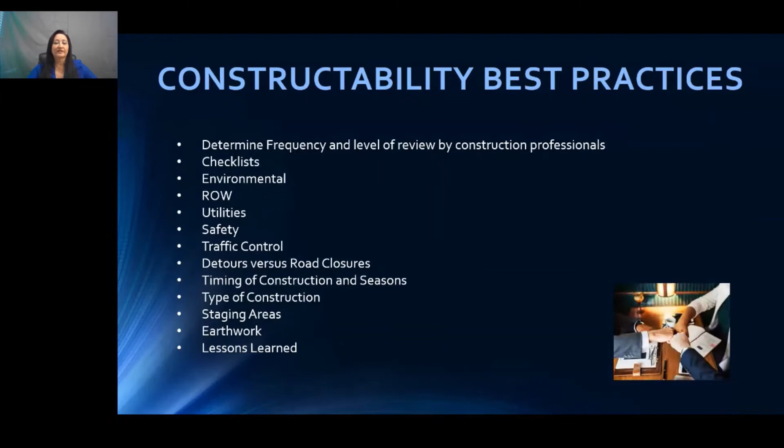And lastly, you want to document as you go for ease of incorporation, and record any lessons learned for a repository later so you don't make the same mistake twice.

Then somebody looks at it and says, that's not going to work, shows you something, and you've got to go back and redesign from scratch. Whereas if it was caught at 30%, you wouldn't have been that far along in design - it could have been resolved early on. So a little bit of time and money pulling these folks in early will save money and time on the front end, and it will more than pay for itself.

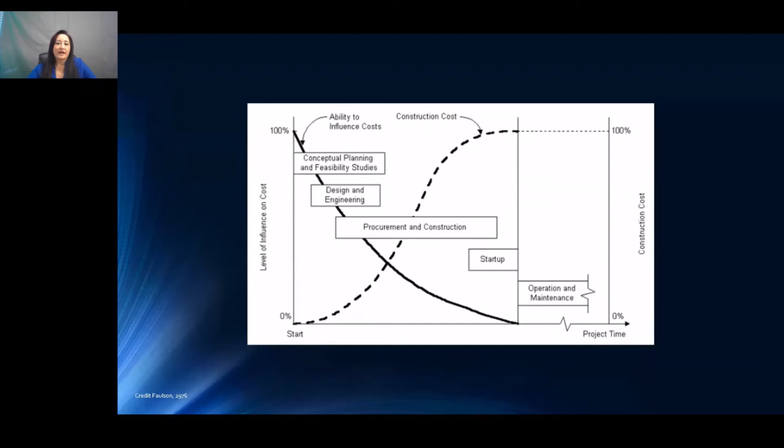As a designer and project manager, if you're looking at this from a budget perspective, just budget a few extra hours to have all of this taken care of. Again, I guarantee it will more than pay for itself.

So here's some things to ask prior to bidding. Are the plans complete? Are all the sections corresponding accordingly? Have all the impacts been considered? Will this project impact any others? Have we accounted for all the pay items and types? Are all the quantities accurate? And again, can it be built as shown?

So regarding contracts and procurement, this is a little bit of an anomaly. It's kind of a specialized field that even design and/or construction don't actually take into consideration, but it's very important to your project.

So for bid documents, they need to be clear and specific. When you're writing your specifications, especially your special provisions, it requires a little bit of a different mindset. You've been in the project, you've been designing it, you're down in the weeds of it, but the person that's bidding this and the person that's actually going to build it doesn't have access to all this information that's in the back of your brain.

So basically, what I tell people is when I write these, I try to explain it in a way that my 9-year-old daughter can understand. They need to be written in a way to convey your information and your intent to somebody who's completely unfamiliar with the project so they can understand what you're trying to do. It can't be ambiguous in any sort of way.

If you do this, it will ensure that you get better pricing on the back end because the contractors will be clear on actually what they're bidding. And I'm not saying all contractors are like this, but it will also prevent the contractor from potentially taking advantage of something that was ambiguous or vague. That way you can be certain that the low bidder isn't going to try to put in a change order late for something you may not have been very specific or clear about.

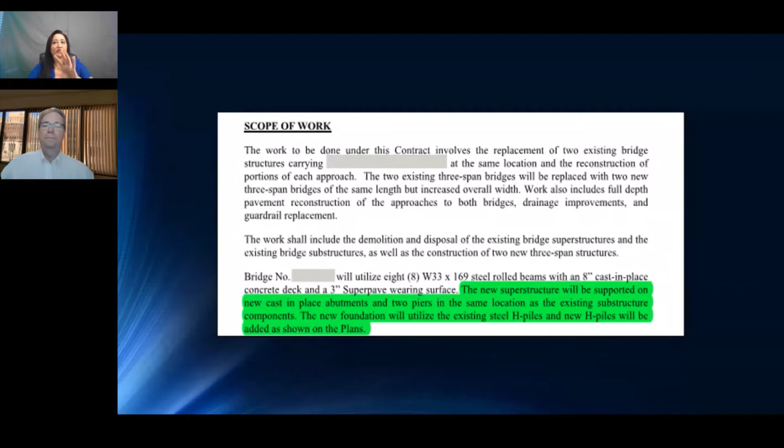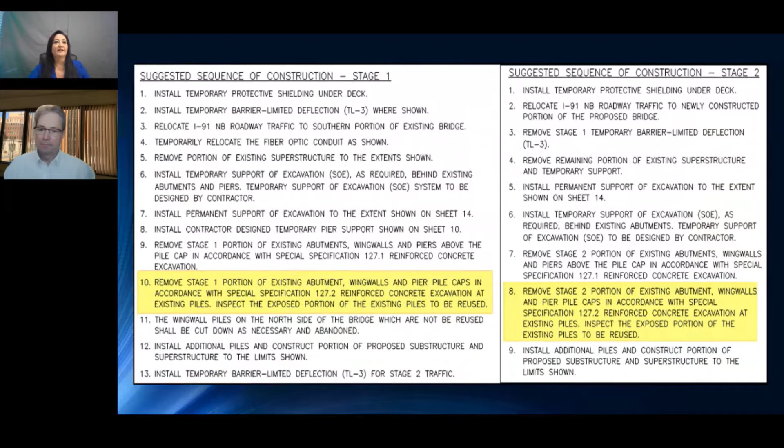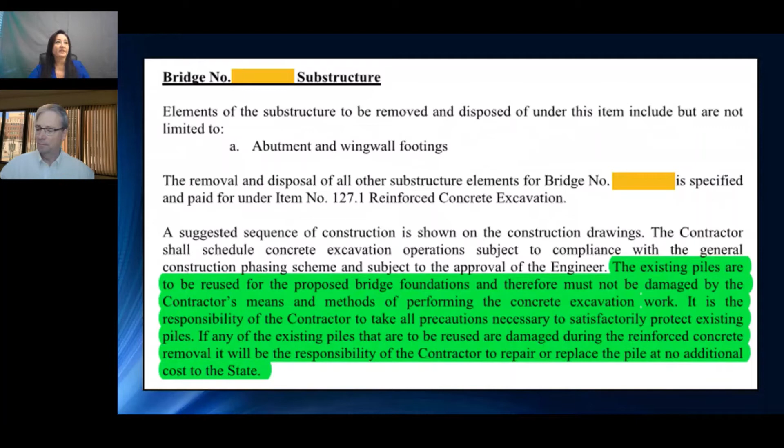So again here, we've actually got two stages, basically outlining the same stages. You are going to reuse these, you need to inspect it, you as the contractor need to make sure everything's like it's supposed to be. Again, clear: the existing piles are to be reused, you are not to damage these in any way, you are supposed to take any necessary precautions, etc. In the special provisions, again, you think they're beating a dead horse here. They've gone through everything, telling you that you as the contractor have to take and are responsible for all of these items.

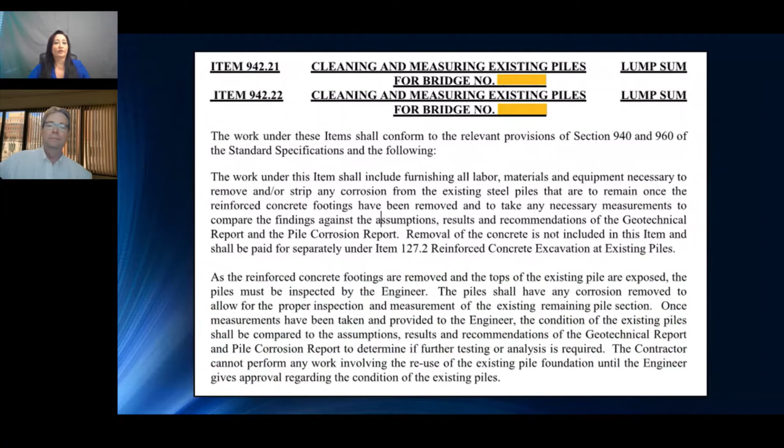But in hindsight, after this project actually went to construction, there were some problems. During the initial baseline schedule development, the contractor said, well, we assumed the designer was going to do a 3-day review period. Well, that's not realistic, but they didn't say what the requirements were. So the department tried to argue that engineering reviews are standard 30 days, but then the contractor argued, well, then you should have specified you were going to take 30 days, I thought you were only going to take 3. Specific to this example, they agreed to 7 days and moved forward. During the actual performance of the work, bearing in mind none of us have X-ray vision and can see what's under the ground.

However, anytime you're doing something, especially underground where you can't see, you want to assume the longest time frame in the worst case scenario. During the actual performance of this work, the contractor did the initial cleaning and prep that was called for, pulled everything out, and it turned out there was an apparent section loss at the top of the pile. The engineer had to go back and look at that, which took even longer than the original 7 days they'd agreed upon.

Then they had to go back and forth to figure it out, there were change orders, and everybody was confused. Ultimately, after an extended period of time and further geotechnical analysis, the engineer had to scamper to come up with an acceptable repair procedure to move the project forward. Unfortunately, all this back and forth cost the project in excess of 200 calendar days.

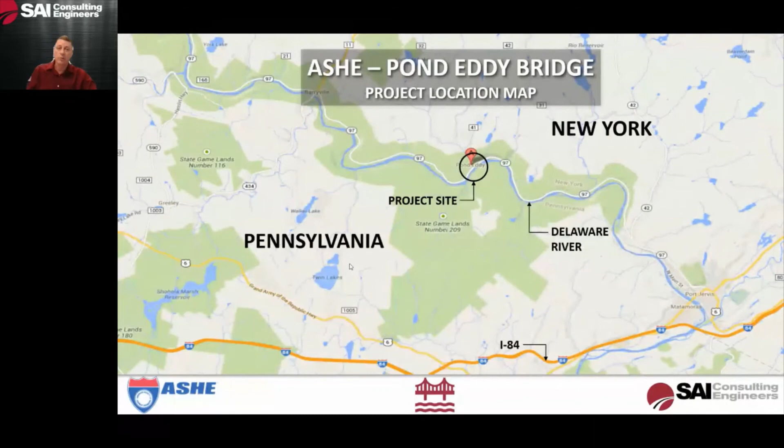This is the Pond Eddy Bridge Replacement Project. My name is Greg Soule, and I work for SAI Consulting Engineers. This project is located in Northeast PA on the Pennsylvania-New York border, and the bridge crosses the Delaware River. We are just north of Interstate 84.

The project site, New York 97, runs along the left side of the river. There are two intersecting roads, High Road and Hollow Road, on the New York side. On the Pennsylvania side of the river, we have two unimproved dirt roads and the Norfolk Southern Railroad. The Pond Eddy Bridge connects Shohola Township, Pike County, and Lumberland, New York. The site is located within the Delaware Scenic and Recreational River National Park.

What's unique about this site is that the bridge serves as the only access over the Delaware River to the community of Pond Eddy. The community is actually landlocked in Pennsylvania, surrounded by Pennsylvania game lands. The ADT on the bridge is only 30 vehicles a day. However, the boating traffic through the bridge during the summer peak season can be in the hundreds or even thousands.

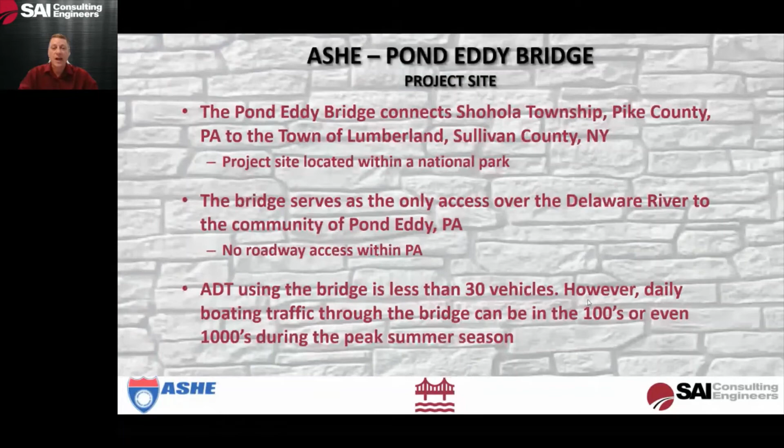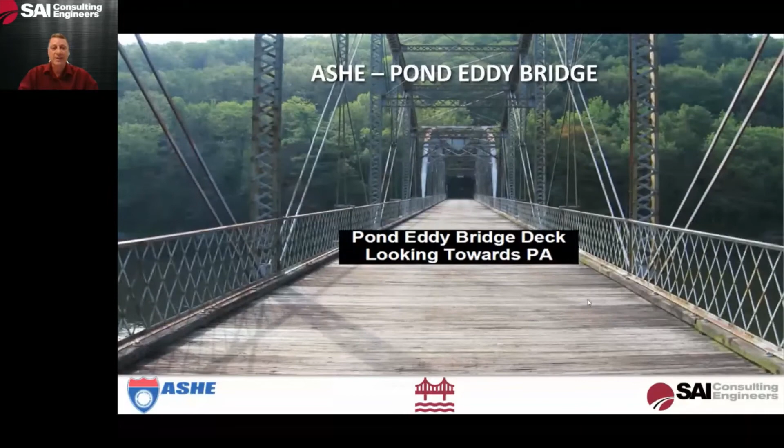This is a picture of the existing Pond Eddy Bridge looking downstream, and a picture looking at the deck. There are wood slats here. The bridge was built in 1904 and 1905. It's a single lane, two-span, pin-connected Pennsylvania through truss. The existing structure throughout design was rated as poor, with weight postings as low as 3 tons.

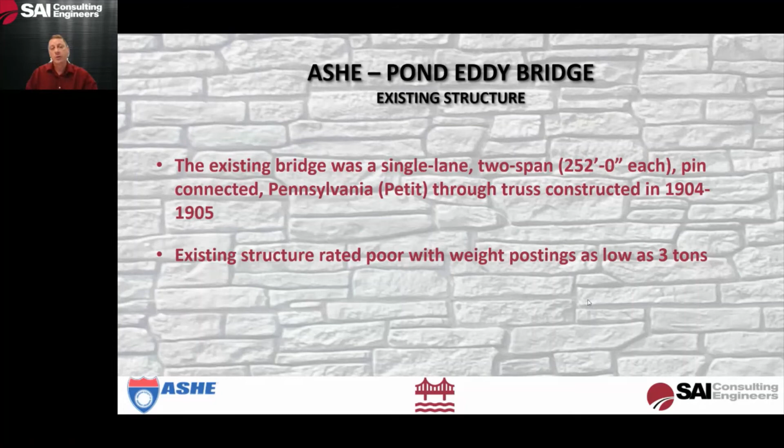What this really meant is that the residents of Pond Eddy could not be accessed by emergency vehicles, and they couldn't get delivery trucks in for things such as oil, coal, propane, those types of necessities.

So in 1993, long time ago, PennDOT began an 18-year study of alternatives with consulting parties, the public and stakeholders. They looked at a number of alternatives: no build, off-site avoidance - could we bring in a new road through the game lands to access those properties? Rehabilitation of the existing structure and full replacement. We even looked at one point at could we purchase the properties on the Pennsylvania side, but that ran into some major legal hurdles, so we had to abandon that immediately.

In 2011, a memorandum of agreement was signed to replace the bridge with a number of conditions. One, we had to do historical recordation of the bridge. We had to market the reuse of the existing bridge - we did have a couple inquiries about it at the time, but due to the deteriorated condition, we really had no takers. We formed the Pond Eddy Design Advisory Committee, or DAC, which included all of the agencies, including National Park Service, historic preservation groups, municipalities, community, anyone who had an interest in the bridge. We also agreed to archaeological monitoring during construction, which I'll cover a little bit later.

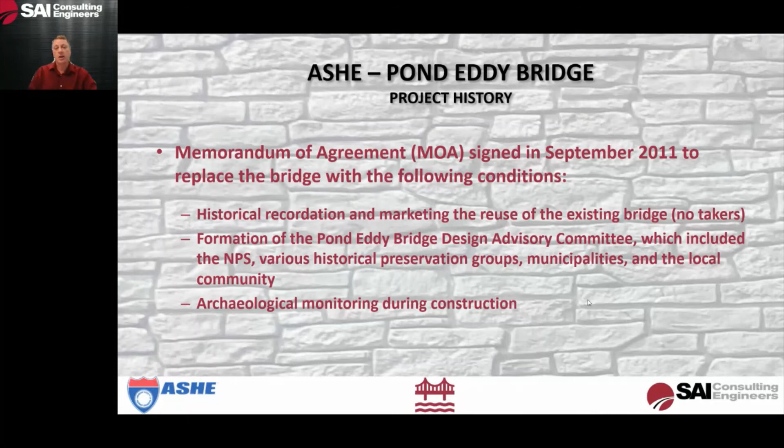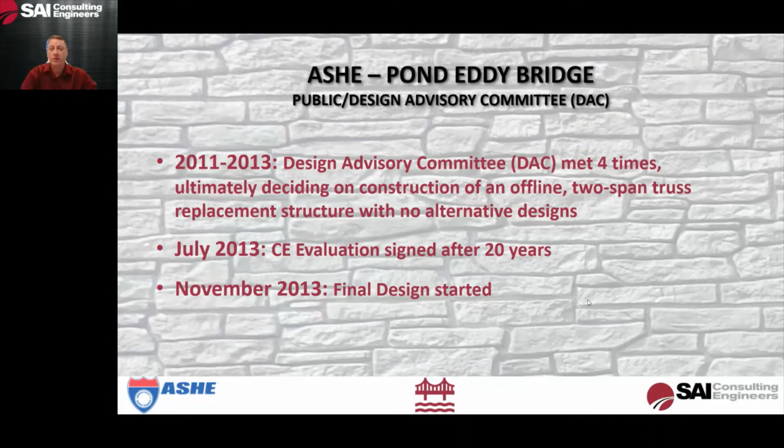From 2011 to 2013, the DAC met 4 times and ultimately decided on an offline 2-span truss replacement structure with no alternatives. They decided on everything from the configuration to the size of the bridge, to the color, to the architectural treatment, all the way down to the stone pattern, the relief, and the color of the stone staining, or the concrete staining. In July of 2013, the CE was signed after 20 years, and we started final design in November of 2013.

So what were our hurdles on this project? We had a number of environmental concerns. We were located within the national park, as I mentioned. There's a federal wild and scenic river and a PA water trail. We had shad and eel in the river, and we had to account for their migration and passage during construction. We had bald eagle nesting sites, and we also had freshwater mussels.

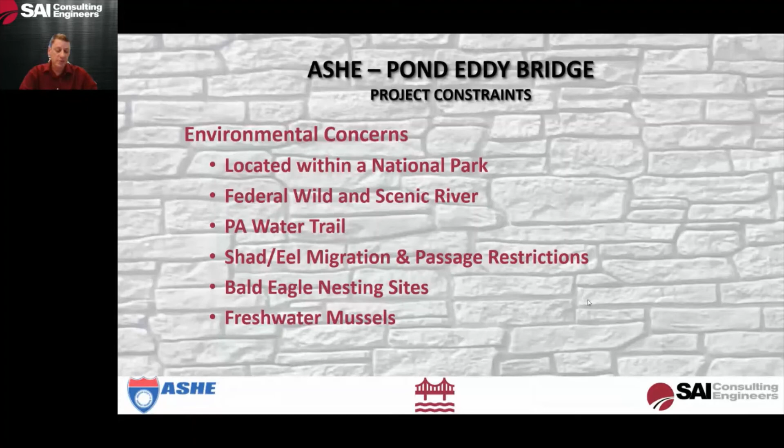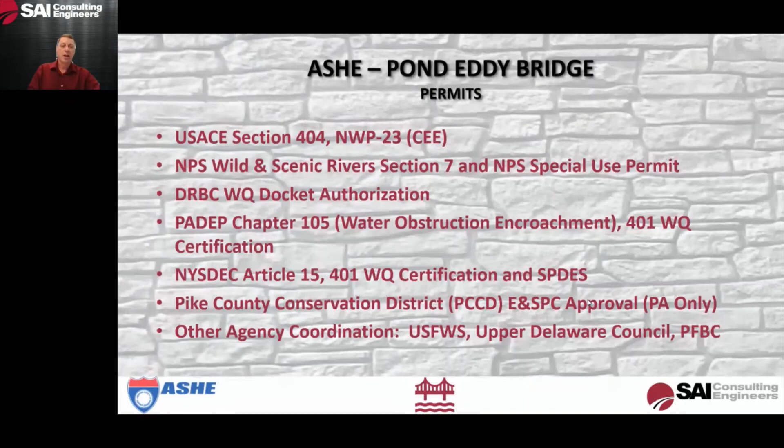With all those environmental concerns, we had our hands full obtaining the permits for this one. We were dealing with the Army Corps, National Park Service, Delaware River Basin Commission, PADEP, New York DEC, Conservation District, U.S. Fish and Wildlife, Upper Delaware Council, and Fish and Boat Commission. It was a struggle at times, but we managed to get our permits with some interesting requirements. We had to relocate over 3,000 freshwater mussels to another site on the river. We had noise restrictions - we couldn't do any demolition or pile driving from certain dates and at certain times.

We had to design the causeway to accommodate the burst speed of a shad to allow migration upstream during construction, so we couldn't have excessive velocities. We had to do pre and post construction surveys of the stream banks and bed, and maintain a hardline phone on the causeway for boaters with emergencies since there's no cell service. They also had to keep a rescue boat on site at all times, though fortunately it never got used during construction.

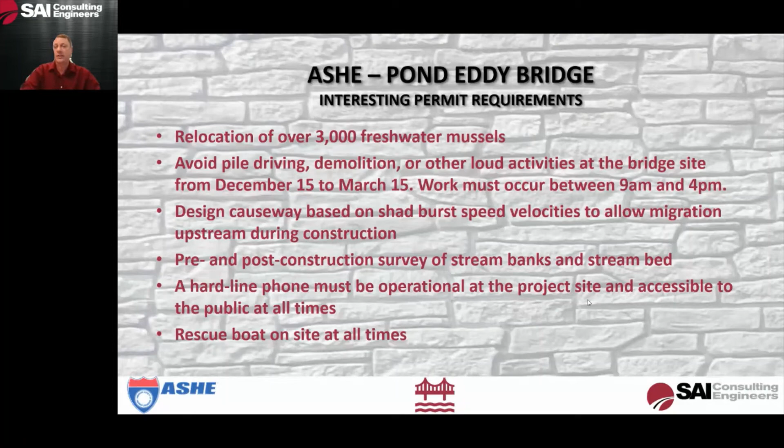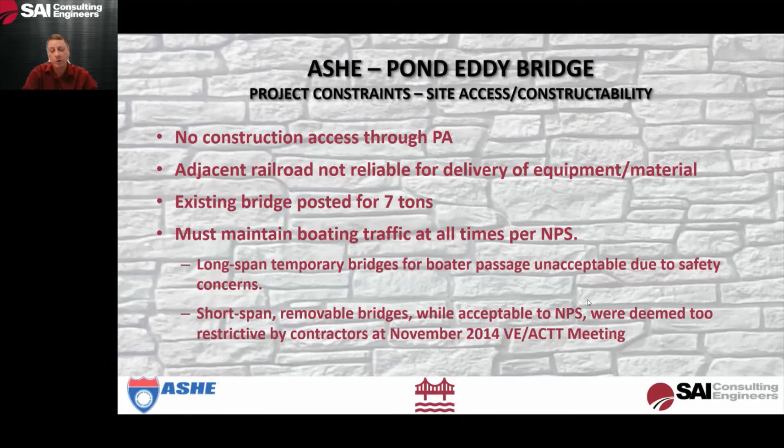The National Park Service required that we maintain boating traffic at all times. Normally we'd put in temporary bridges. We looked at long span bridges for boater passage, but the Park Service said that was a safety concern due to high water conditions and the possibility of canoes and kayakers getting stuck underneath while riding the rapids. We looked at short span removable bridges at a November 2014 VE/ACTT meeting with contractors, but they indicated those were too restrictive given the time to install and remove them, so even though it was acceptable to the Park Service, we had to rule that out.

So what we agreed to at that VE/ACTT meeting was a half-width causeway constructed in the New York Channel. Once the New York span of the truss was completed, they would relocate the rock directly from the New York Channel to the PA Channel and build a ramp from the end of the new truss down to the Pennsylvania Causeway, allowing delivery of additional materials and equipment and letting the contractor get equipment out of the river during high flows.

We had to design the causeway to allow the contractor to work 90% of all calendar days. We were trying to maintain a 150-foot minimum channel opening for the boaters, and we had to do the H&H analysis to accommodate a 5-year storm event within the 100-year floodplain.

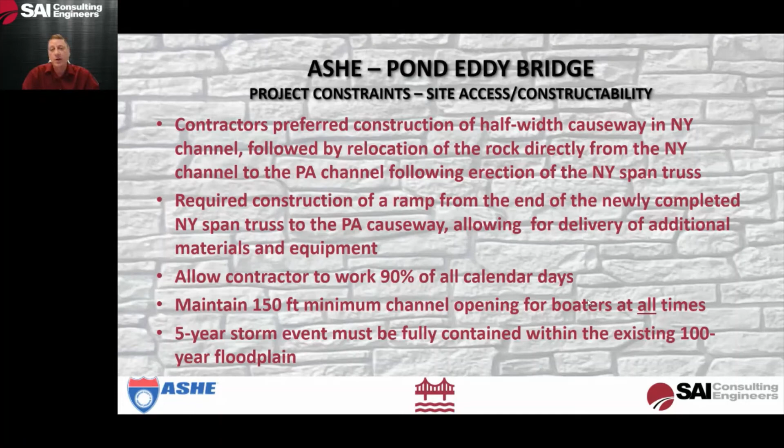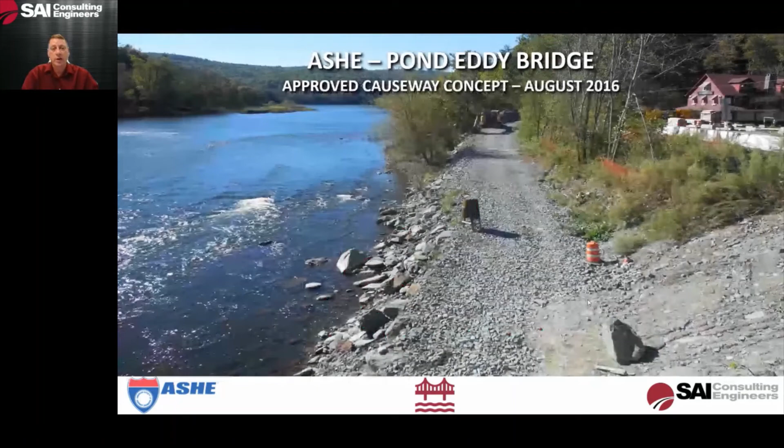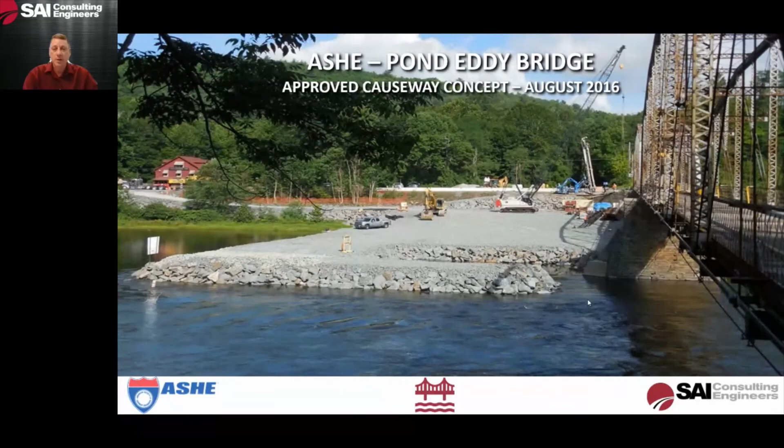So the results of all that are in the pictures to follow. We started in August 2016 with an entrance ramp to the causeway along New York 97, and then we essentially put a football field of rock, R8 and R3, into the New York Channel. You can see the contractor with all of his equipment and materials stored on that causeway. We did design the causeway to overtop and made sure that occurred. We had about a half a dozen overtopping incidents over the two years of construction.

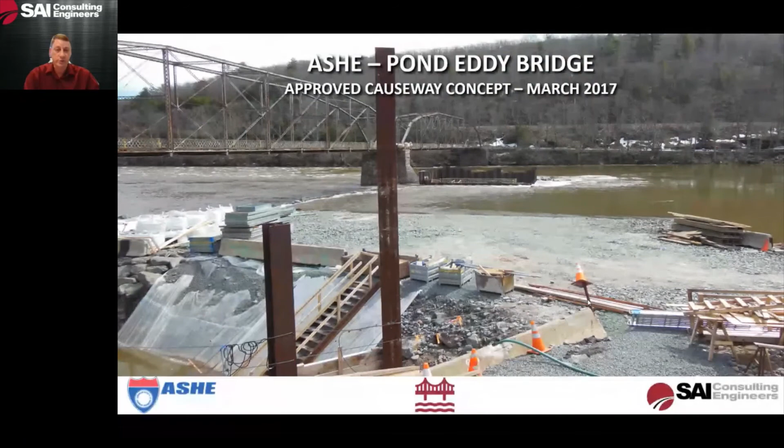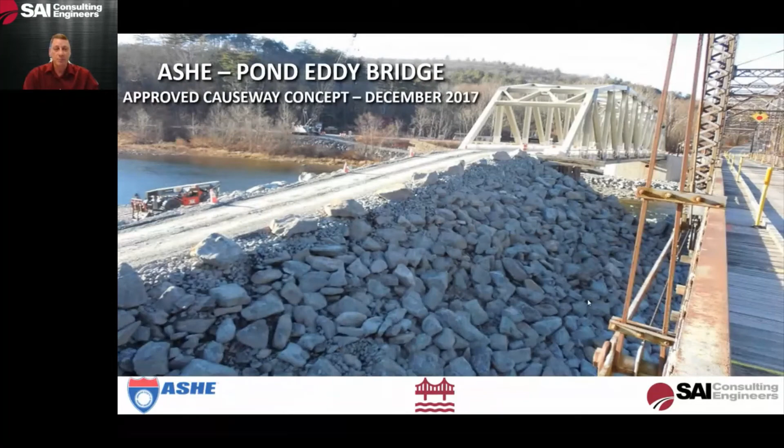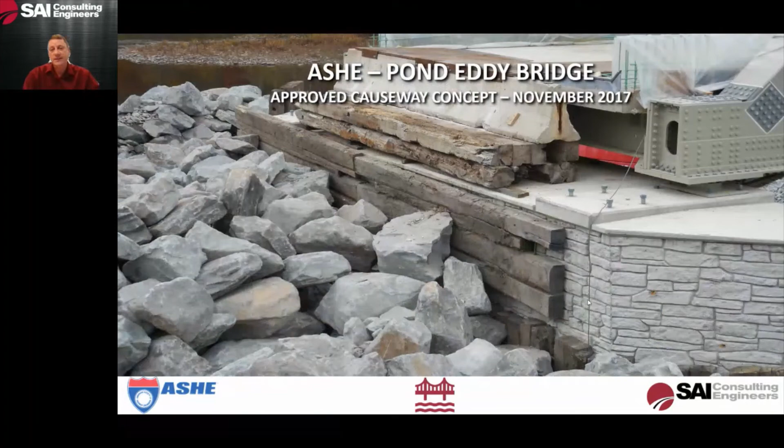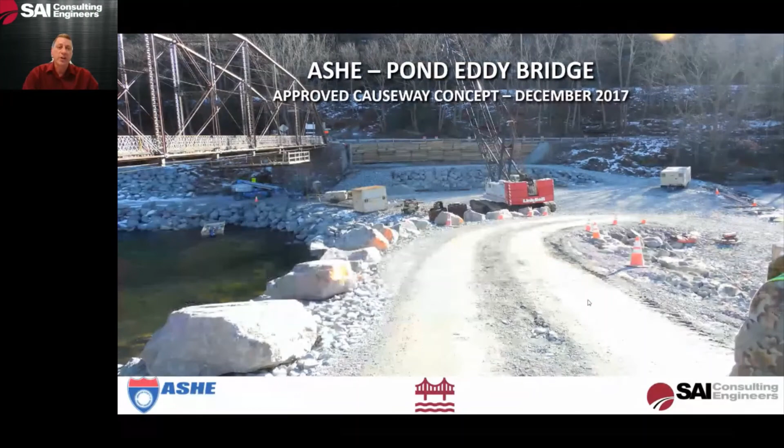This is a picture of the ramp built from the end of the New York truss down to the Pennsylvania Causeway. It was about 30 feet of R8 and R3 rock. We actually installed railroad ties against the architectural treatment of the pier to prevent any damage. This is the completed ramp on the Pennsylvania Causeway, looking down from the top. It was constructed at about a 12% grade, which was acceptable to the contractor.

We also designed an exit strategy for the contractor on the Pennsylvania side. This included a platform for staging and storage of materials and equipment, since we were very limited in area on the Pennsylvania side.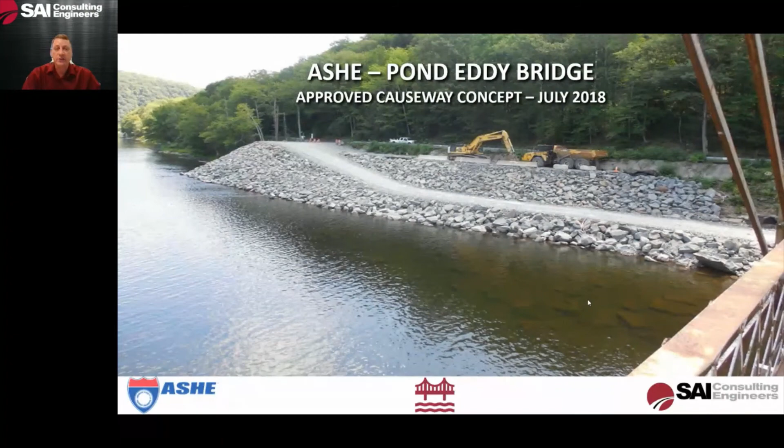Some other things we did with the design: we had continuous public outreach, including newsletters sent to the community and municipalities, and a website maintained for the project so people could get regular updates. We had several meetings with the rafting, canoeing, and boating businesses up there, who were extremely concerned about the impact on their local businesses. They weighed in on the 9-stage ATON plan we came up with. We also held a public meeting in January 2016 to update everyone, including the DAC, on the design progress, schedule and sequence of construction, and to present a 3D bridge model.

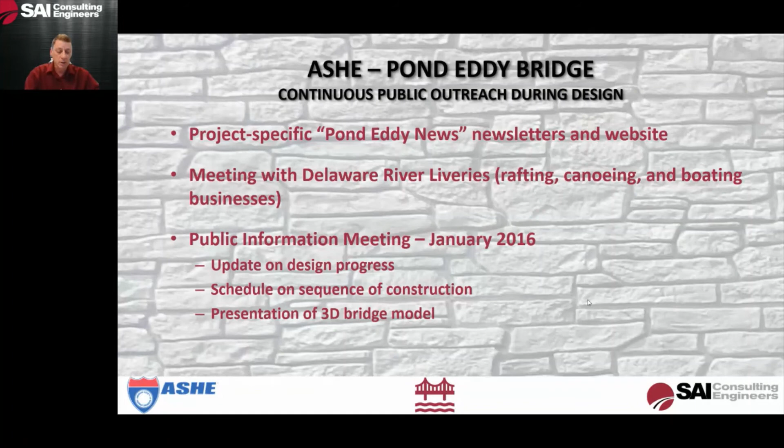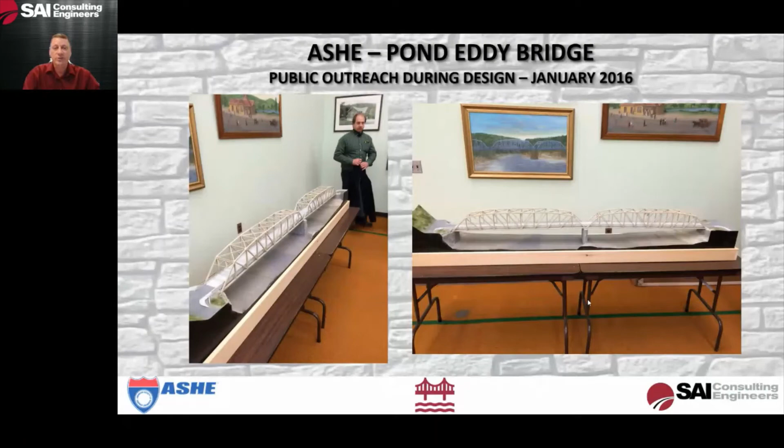We worked with PennDOT's central office. They had just acquired a new 3D printer, and we printed a model of the Pond Eddy Bridge, the new bridge. This model was taken to the public meeting and it was a huge success. If you get a chance to visit District 4's office once COVID restrictions end, you'll be able to see this model in their lobby.

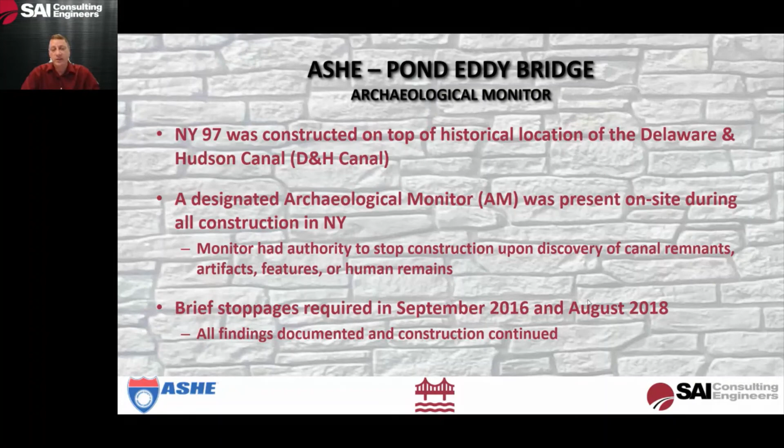I mentioned the archaeological monitor. New York 97 was constructed on top of the Delaware and Hudson Canal. We agreed to keep an archaeological monitor on site during all construction activities in New York. That monitor had the authority to stop construction upon discovery of anything related to the canal, from artifacts and features to human remains. Fortunately, we didn't find anything on the human remains side. We did have some stoppages in September 2016 and August 2018 when we uncovered a few sections of the stacked stone wall. Here are a couple of pictures of what that looked like. All of this information was documented, photographed, and construction continued right from there.

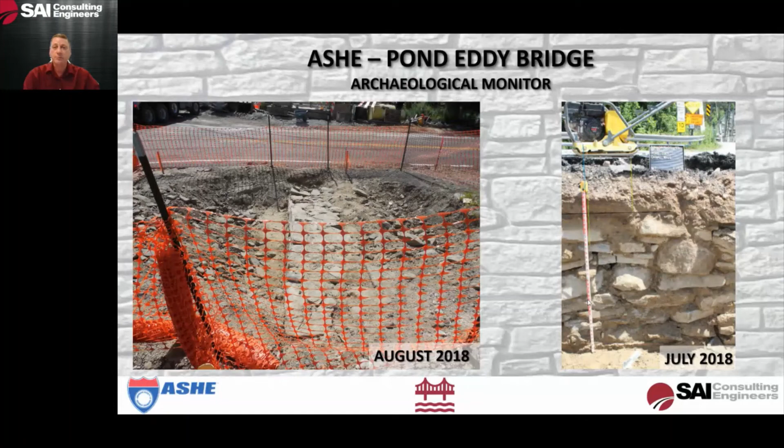I'm a highway guy, but I'll go a little into the structure design. This is a 506-foot, 2-span steel Pratt truss bridge, constructed immediately upstream. The Pennsylvania abutment used drilled caissons, and the foundation of the pier and the New York abutment used steel H-piles. The truss member size, shape, and configuration were designed to mimic the existing structure per the DAC requirements, while also meeting current design standards.

We had many redundant members in the design. In light of what happened with the truss in Tennessee, that is obviously warranted. We also did erection analysis to determine how this was going to be built on the causeway on site.

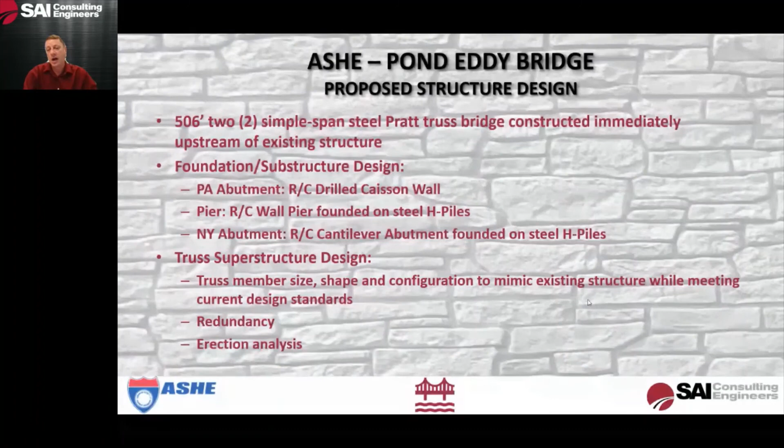The typical section is a 15-foot 8-inch travel lane. It's a 500-foot, 1-lane bridge with a 5-foot sidewalk and a 10-inch bridge barrier, about 10,000 square feet of deck area. By the numbers, we had about 1.3 million pounds of steel, 8,000 shear connectors, 2,500 feet of piles, more than 30,000 cubic yards of R8 and R3 rock placed in the Delaware River, and more than 2,000 plantings used to restore the stream banks following construction.

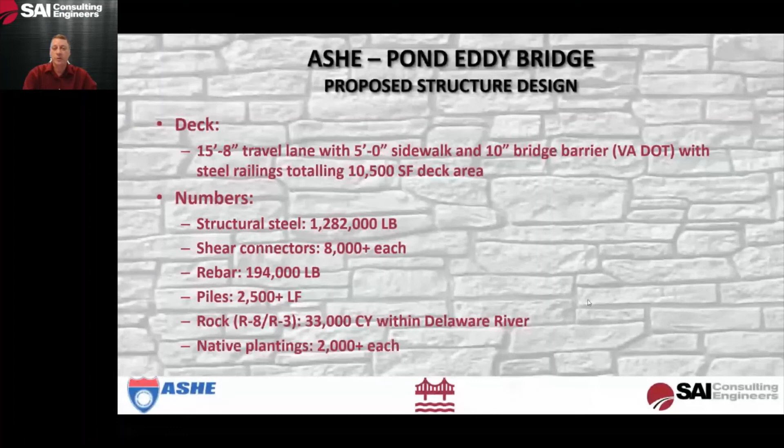Some other unique features of Pond Eddy: we used a proprietary dewatering system. We could not use traditional pumped water filter bags, so we used a truck-mounted trailer with baffles to clean the pumped water. We also had a spill containment berm that allowed us to refuel equipment on the causeway.

We did temporary and permanent relocation of a USGS stream gauge, added a National Park Service water quality monitor to the pier, and had a bioretention area in New York. We included an interpretive panel installed adjacent to the sidewalk to document the history of the bridge, and we included vibration monitoring on the existing stone masonry piers and abutments.

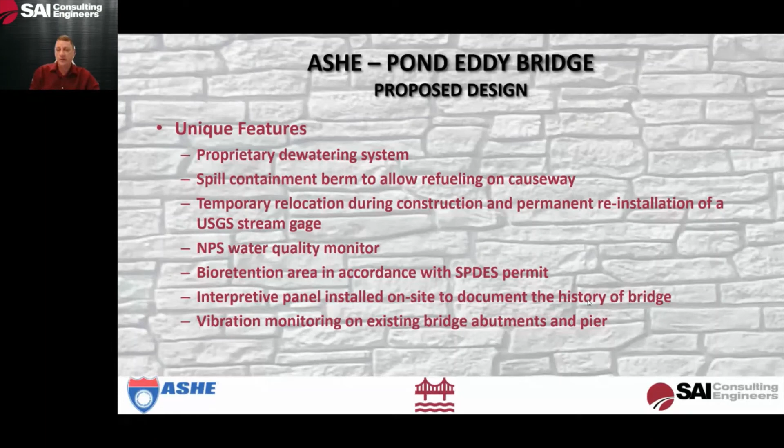There was concern that the pile driving and some of the work we needed to do during construction was going to cause stability issues with the pier and abutments. It turns out that the engineers and contractors who built the bridges in 1904 and 1905 had it together, and we didn't encounter a single problem along the way.

In April 2016, with a bid of $17.2 million, D.A. Collins from New York was awarded the contract. The fabricator was Casco Bay Steel Structures from Maine, and they got notice to proceed in June 2016.

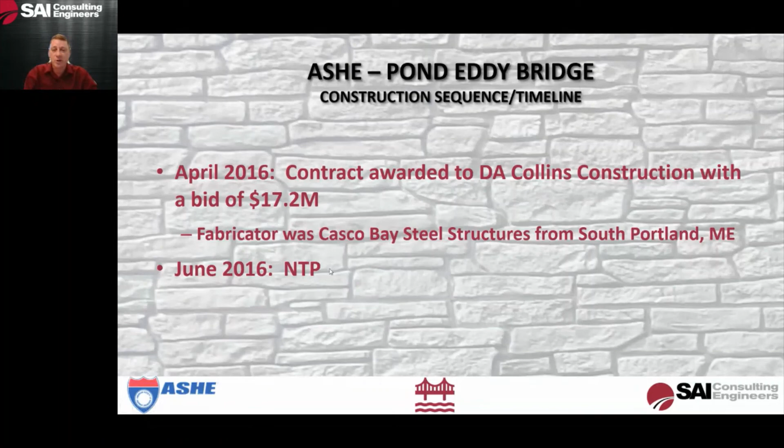With that, I'm going to take you through a bunch of pictures from construction. Since we're somewhat limited on time, I'll move through these pretty quickly. We were fortunate that SAI was on board for construction services. We attended bi-weekly construction meetings with the contractor and PennDOT throughout construction, and we learned a tremendous amount from being on site so regularly.

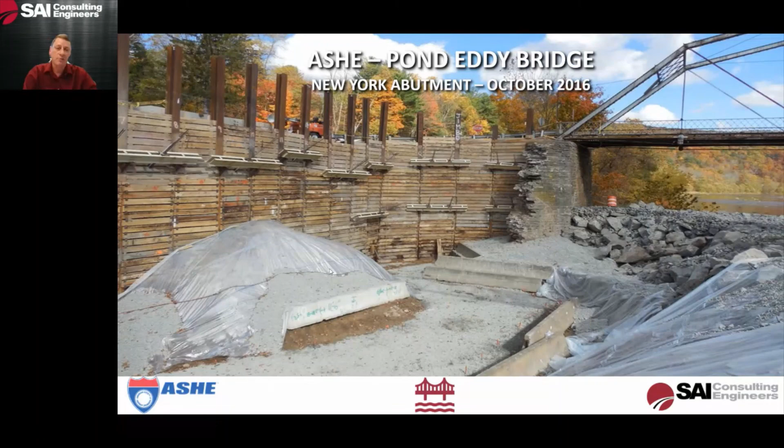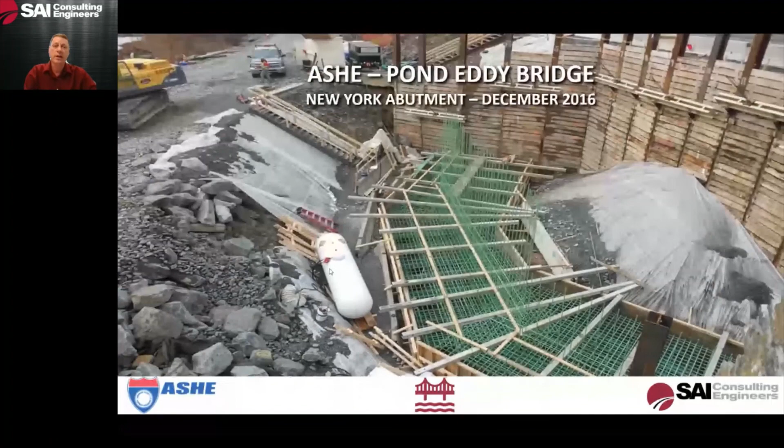In October 2016, this was the construction of the New York abutment. The shoring was installed, excavation was complete, and removal of part of the existing masonry abutment was complete. They completed pile driving in November 2016 and placed the foundation rebar in December 2016. By April, we had a completed New York abutment.

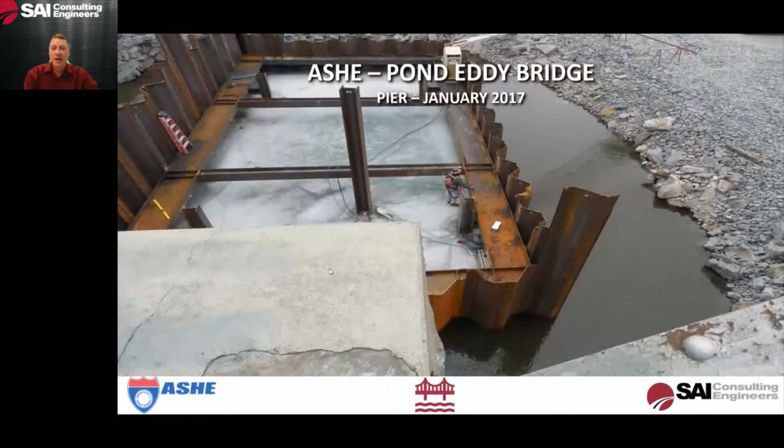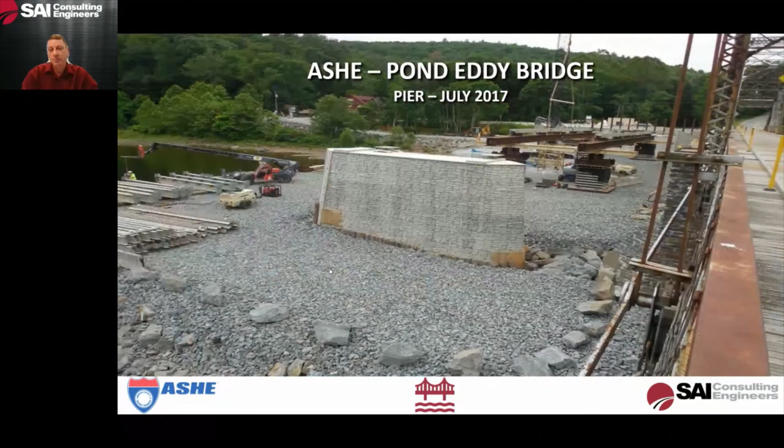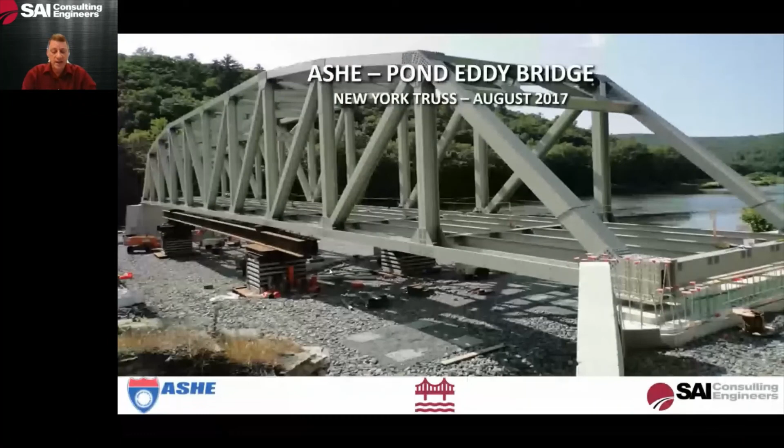Erection of the truss started shortly thereafter in July. This is the New York span, and as I said, it was stick built. The contractor put together some temporary bents, pretty beefy and very sturdy, used for construction, 4 of them. They continued the stick construction from there, and by August of 2017, we had a completed New York truss.

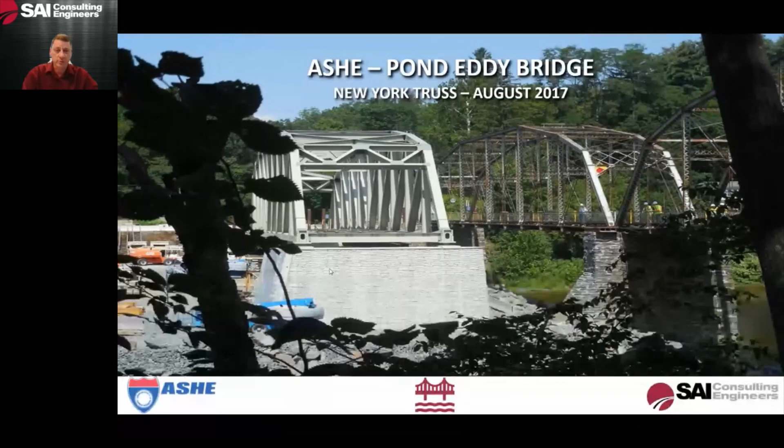We had some nice pictures of that. This will give you an idea of what the new truss and the old truss looked like standing side by side. Very similar shape, but obviously a lot beefier and sturdier than the old bridge.

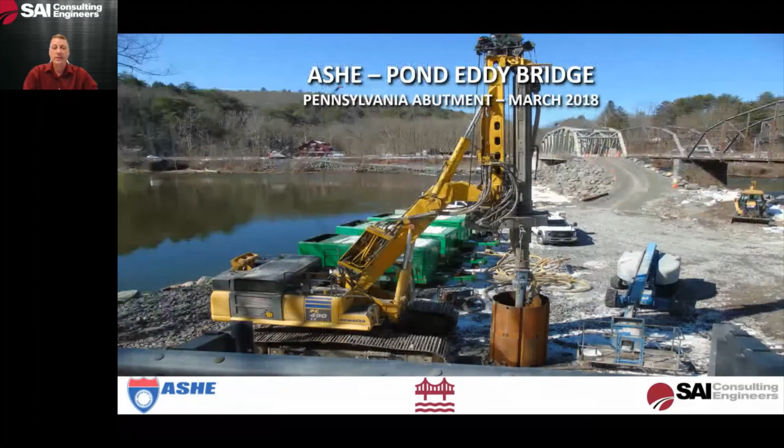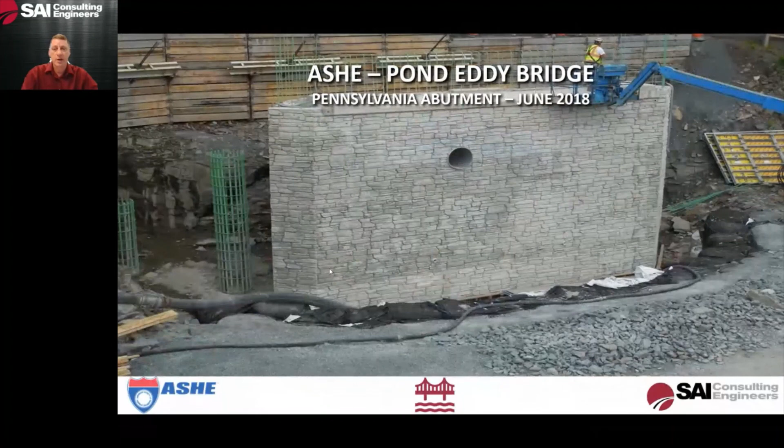Between August and December 2017, the causeway was moved from the New York channel to the Pennsylvania channel, and the Pennsylvania abutment construction started immediately thereafter. They were drilling caissons in March of 2018, the rebar cages were in June of 2018, and we had a finished abutment that same month. They ended up pouring and doing the wing wall work a little bit later so that they could get the truss moving a little quicker.

So in June of 2018, they were working on the truss erection on the Pennsylvania side. They used the same temporary bents that they had used on the New York side. By July 2018, the truss was essentially put together. Again, this is a picture showing the new truss directly adjacent to the old Pond Eddy Bridge.

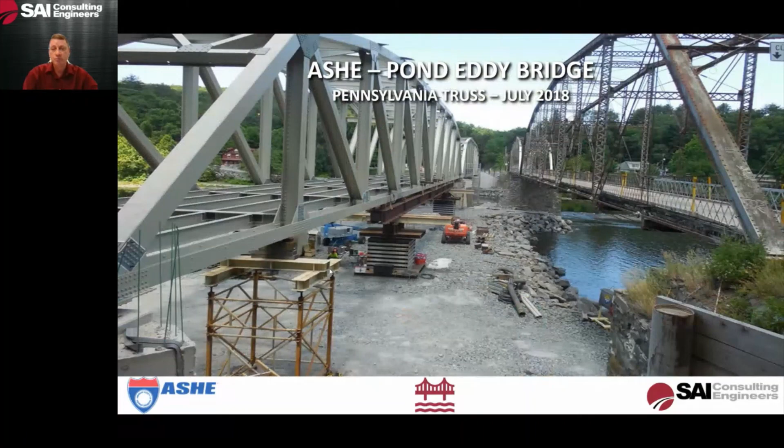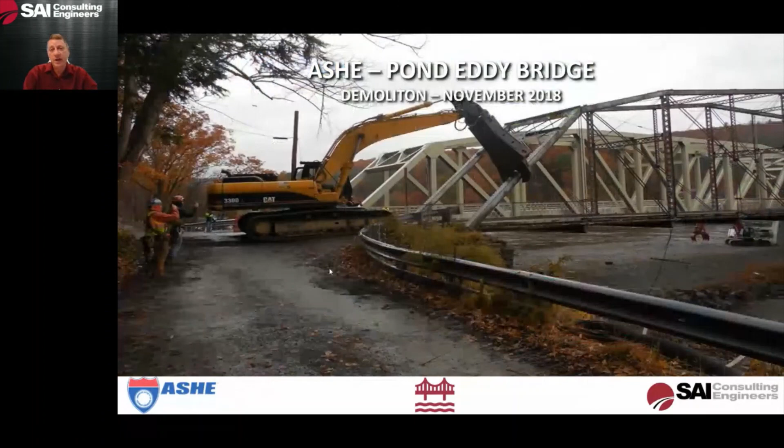The deck was poured in August of 2018, and then through some finish work, they finished the bridge in October of 2018 and opened it to traffic. They didn't waste any time - immediately afterwards, they started demo of the old bridge.

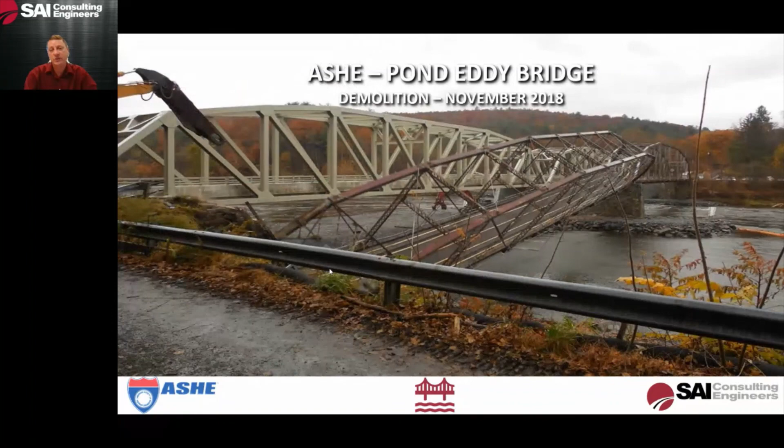This was the most simple demolition you could possibly imagine. They attached a chain to one of the top members of the truss and attached the other end to a bulldozer sitting on the road. They brought in a piece of equipment with a steel cutter - basically a quick snip and a pull by the chain, and the bridge came down in a matter of seconds, just adjacent to the Pennsylvania Causeway.

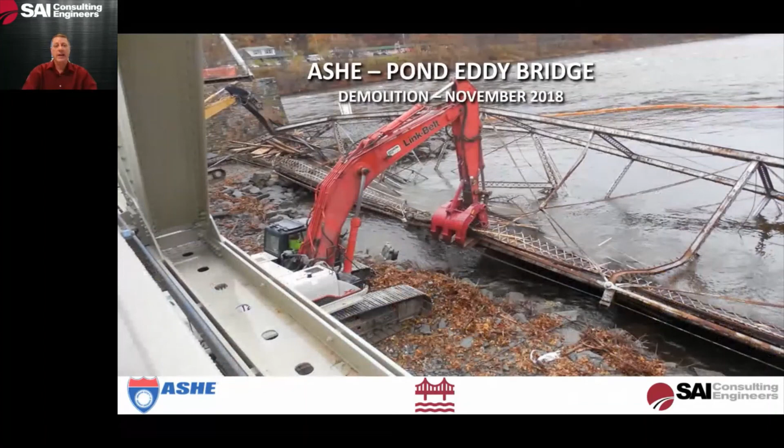We had worked out with the permitting agencies to make sure this was acceptable. They were okay with it as long as we put a provision in the contract to have the truss members and any debris removed within 48 hours of dropping it in the river. So we finished that up, and they immediately built a small platform on the Pennsylvania Channel and did demo of that, and the bridge portion was done.

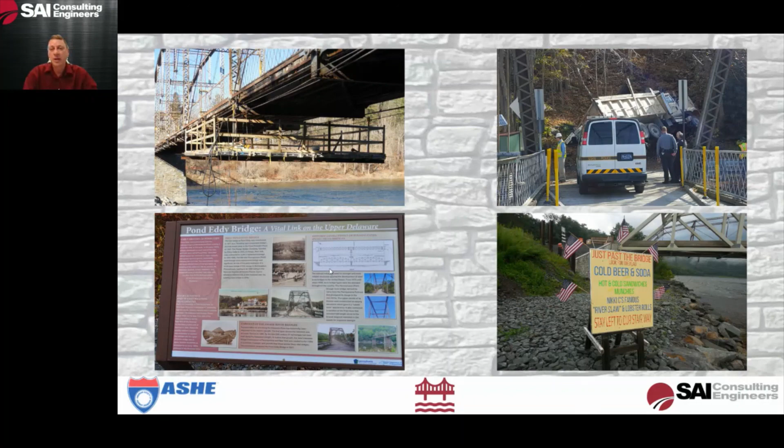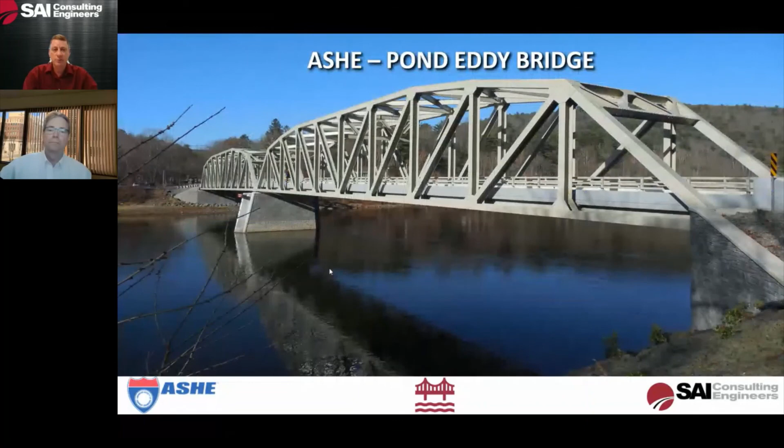So with that, a couple finished pictures of the Pond Eddy Bridge. Like I said, it's fully open to traffic. The old bridge has been removed, and the site has been restored as much to its original conditions as possible.